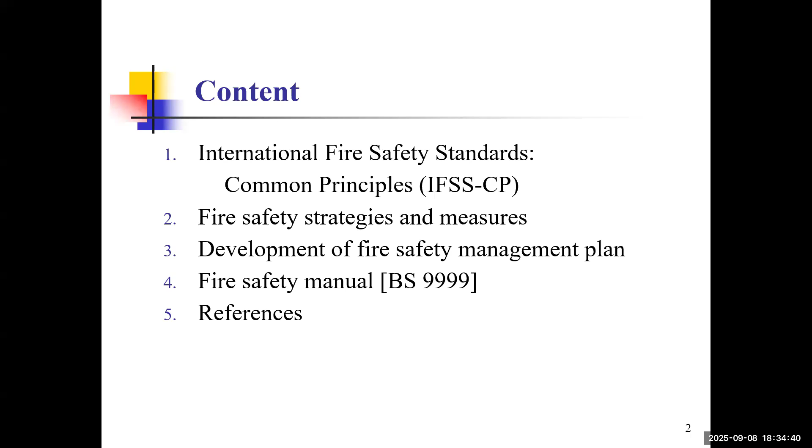So let's start. Let me hide the, sorry, hide this one first. Where can I hide this?

For the international fire safety standard, or the common principle. Common principle is a common set of internationally accepted principles for fire safety aspects, related to engineering design, construction, occupation, and ongoing management.

Sorry, I need to hide this first. How can I hide this? Okay, thank you. Floating meeting controls. Yes, otherwise it will block the view.

Now, the common principles are related to all real estate classes, and all regions and nations, regardless of political, economic, social, and technological differences. Fire regulations are designed to ensure safety and minimize the risks associated with fire hazard. Some of the principles target safe buildings, safe lives. Now, prevention, the first one.

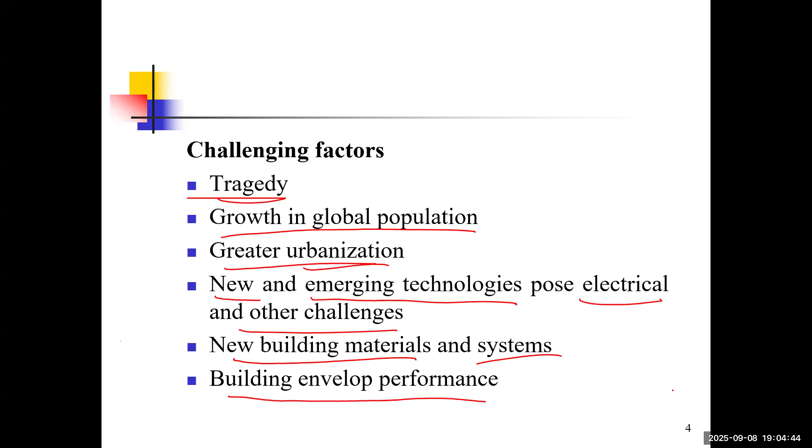Again, inspection, maintenance, and the use of some tested fire stopping system is necessary. Okay, so now we aim to improve the cost, business efficiency, quality, customer satisfaction, environment performance, and sustainability, predictability of

delivery time scales. Now for the costs, about money, we need to improve the cost efficiency. For example, we try to optimize the resources being allocated and try to streamline the process so as to reduce the time, the waste. The organization can also lower the operation costs and expenses.

Now, we have effective cost management, which involves careful budgeting, and we also have regular financial monitoring and adoption of cost-saving technologies. Now, this helps to ensure projects remain within the budget, increase the profitability, and try to have better value to the stakeholders, the client, for example.

Besides, the transparent cost control allows trust to be built between the client and the investor, which will secure future business and investment. Okay, so ultimately, the improved cost efficiency will support long-term financial stability and competitiveness in the business and the market.

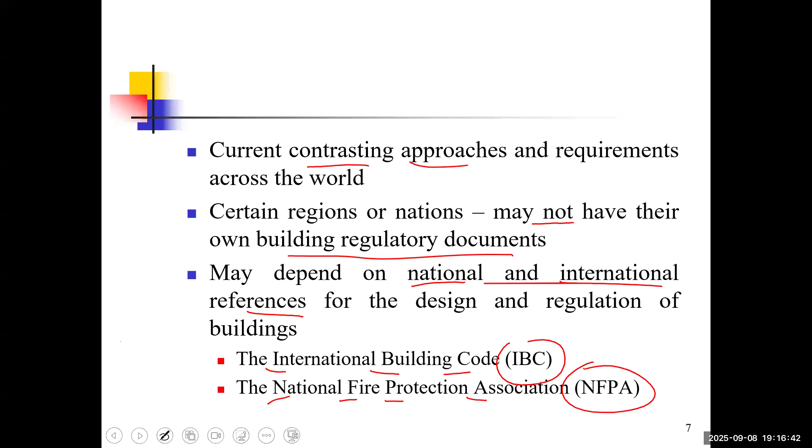Now, fire safety related UN Sustainable Development Goals. The following are fire safety related: the United Nations, UN, Sustainable Development Goal, SDG.

For example, we have good health and well-being. Fire safety reduces injuries, fatalities, and long-term health impacts caused by fire, supporting healthier lives and well-being.

For quality education, we consider schools' education to ensure uninterrupted education, and this also protects students and staff from fire hazards, fostering a secure learning environment.

We also have industry, innovation and infrastructure. By carrying out fire safety standards in infrastructure and industry, this encourages innovation in building materials and construction methods, while protecting investment and ensuring operational continuity.

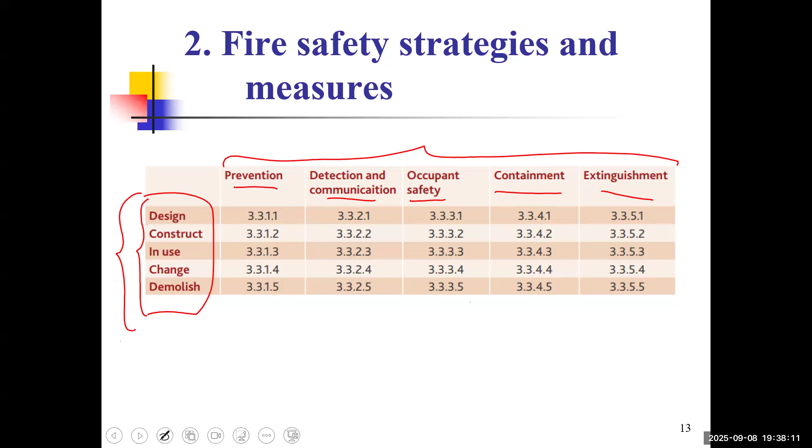So we may have some steps, in fact, for the framework.

If we look at the next slide, you can see we have the prevention principle, to establish how accurate and reliable the information is within the common principles. Prevention, detection and communication.

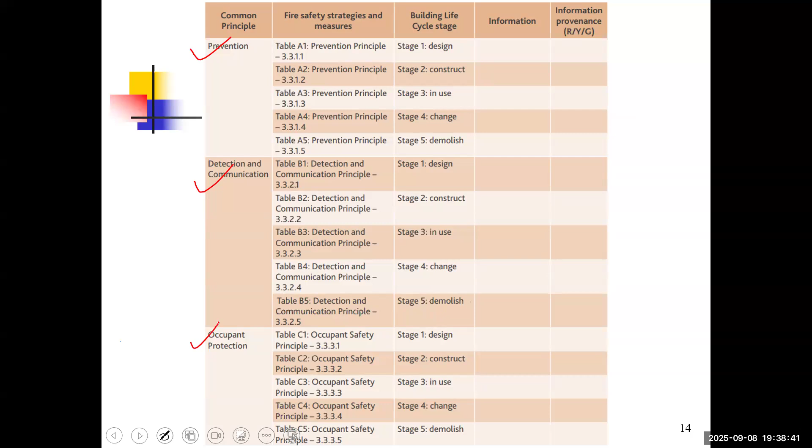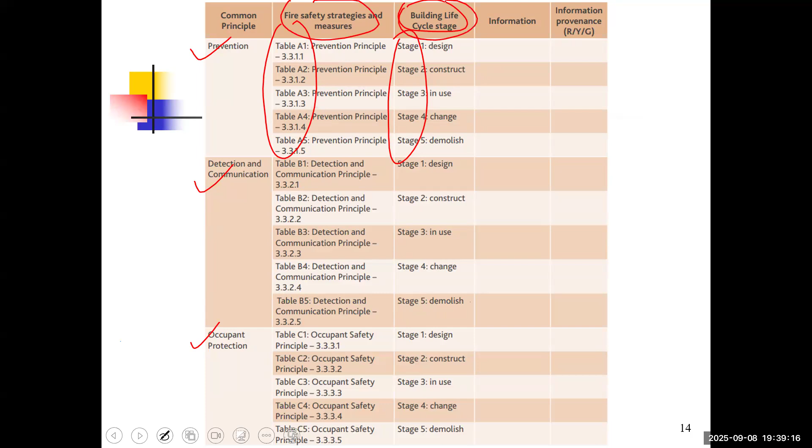On the left column is the common principle as shown, whereas the building fire safety measures is the second column, and the building life cycle stages is the third column. So we have a checklist for all the items.

Now, for the verification and enforcement at each stage, the key components of a good verification process have to include some points.

For example, accountability - that means it must be comprehensive and visible, so it is accountable. It should be competent, have qualified people, qualification, assessment, proper regulations, validation, and certifications.

We also considered quality assurance - it should be valid and verified. We have reviewed the cycle, whether it is in use or the codes. So in order for the framework verification process to carry out effectively, we have different parties for the review.

For example, the reviewer, we have stakeholders, we have independent certifiers and verifiers.

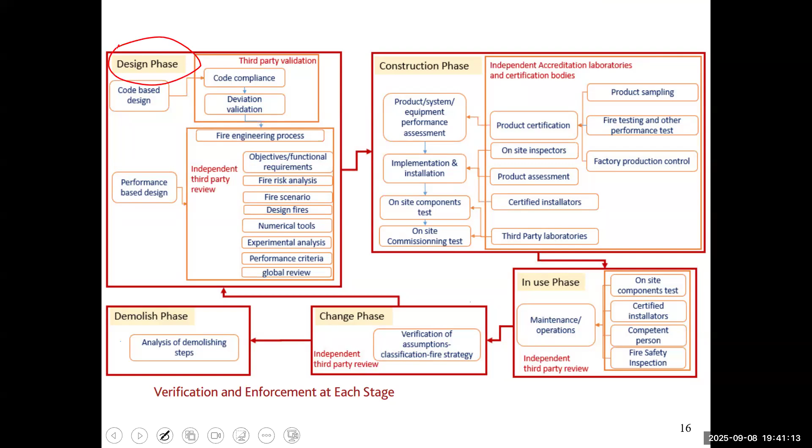The verification and enforcement make sure that the building has the fire safety level intended. It is important and necessary to carry out verification and control processes at each life cycle stage: design phase, construction phase, in-use phase, change phase, and demolish phase. This requires the establishment of an environment with third parties having qualification, certification, and accreditation. Also, involvement of the verifier does not relieve the responsibility of all the stakeholders.

Now, to apply common principles to the building life cycle, we have the prevention principle, which we try to consider at the design stage. The objective is safeguarding against the outbreak of fire and limiting its effect.

Assessment of risk and proposed fire protection measures should take into account recognized causes of fire, for example arson, electrical fire, and accidental fire, which may be caused by cooking, smoking, open flame, candles, chemical spills, hot work, etc. We also have explosion, sometimes due to dust or gas explosion, fireworks, and natural causes like lightning strikes and wildfire, which happens in forests.

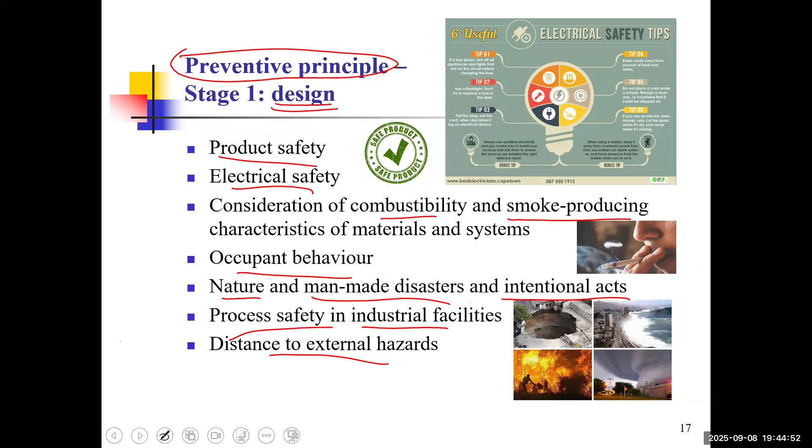The second stage is construction, with respect to the preventive principle. We have security, to prevent intruders or strangers who may deliberately or accidentally start a fire. Security and fire safety sometimes are in contradiction, since we want to allow occupants to evacuate freely without any obstacle.

For example, no door should be under lock. But on the other hand, due to security, we do not want strangers or intruders to come into the building to set fires, so we may lock the door. This may be a concern.

Control of combustible materials on site: control of waste, storage, and disposal away from potential sources of ignition. There may also be storage of construction materials and combustible substances, and control of items stored and used on site which may pose a fire risk.

Assessment of high-risk procedures—hot work permits or controls, for example used for welding and grinding—have to be noted.

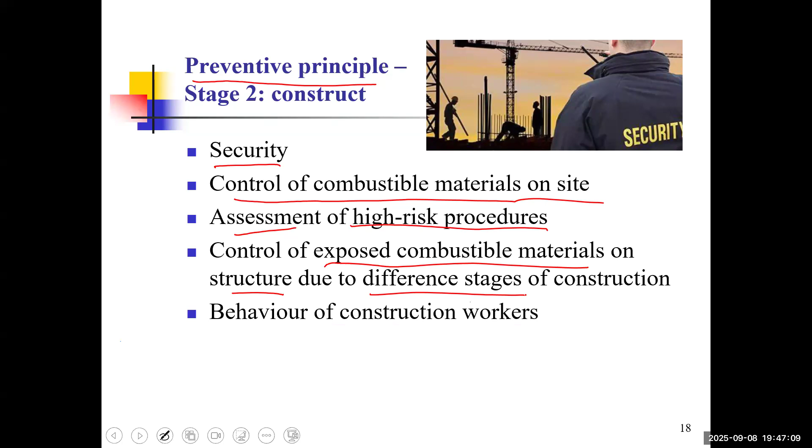Now how about the in-use stage for the preventive principle? We need to educate occupants on the prevention of fire, for example on hot work processes that may cause fire on site, on safe evacuation principles, and on safe evacuation of occupants and their behavior related to smoking and cooking.

Smoke controls—whether the extraction system is properly designed and maintained—electrical equipment safety, and identification of potential hazards such as storage of easily ignited materials in common areas.

Stage 4, preventive principle, stage 4: change. Soft change refers usually to some non-structural modification within a building, for example changes in occupancy, usage, or operational procedures, or introduction of new equipment and furnishing. These changes or adjustments can subtly alter the fire risk and safety requirement.

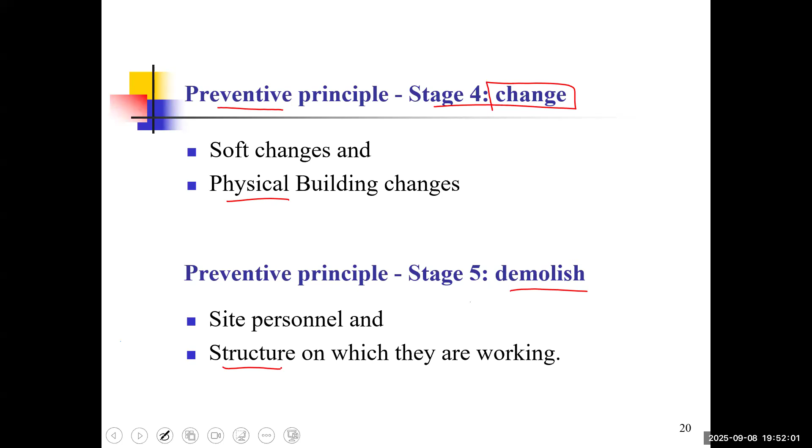Okay, next is the detection and communication principle for the design. During the design stage, the type of detection and alarm communication system available needs to be considered. Especially for high-rise buildings, the potential for communicating to all the occupants inside the building at once, as well as per evacuation zone, should be considered. Sometimes it's difficult to have an announcement for a whole 100-floor building to evacuate at the same time, so we need to separate into zones for phased evacuation.

Now, automatic systems include detection, communication, or even suppression systems. Sometimes the suppression system will link with the detection system. Warning system: we have the warning being activated, voice alarm systems, visual alarm systems, fire service communication, how to notify the fire service and fire brigades. Building configuration, which is internal geometry, sight lines, and spatial layout for wayfinding.

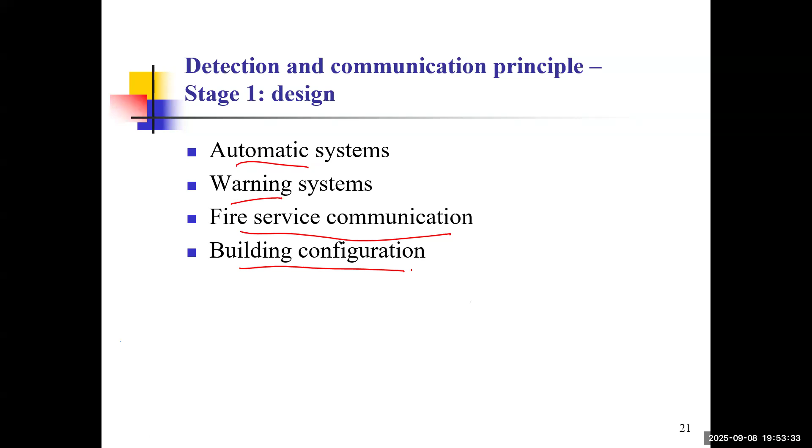Now, for the detection and communication principle during stage 2, construction, the presence of detection and communication is related to phased implementation of permanent systems and also temporary systems for detection, communication, and warning activities. Sometimes they are fixed and sometimes they are mobile. And we have the site office situation, similar, but with site information and the site office to be considered.

Fire service communication and education of workers, especially nowadays when we have more foreign workers who have a language barrier, okay? And we need to have sufficient signage to clearly indicate the safety routes, etc.

For stage 3, in use, when the building is in use, the focus will be on ensuring that the installed systems are available and functioning as intended. So we may have inspection, testing, and maintenance, ITM, of the communication system, fixed and mobile, and the detection system, and we also educate the staff and occupants. And ensure compatibility of new modules and existing systems.

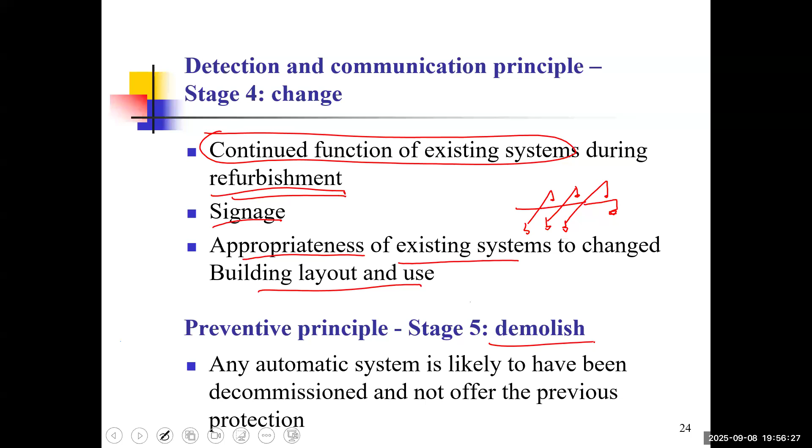Stage 5, demolish. As at stage 2, but it should be considered that any automatic system is likely to have been decommissioned and not offer the previous protection.

Okay, so if you look into the stages, the next will be the occupant protection principle with stage 1 to stage 5. So we are going across the matrix. Now, evacuation procedures, which include simultaneous evacuation. And we may also have phased evacuation, zone evacuation, protect in place and protected lobbies, and also refuge areas or refuge floors. So we need to ensure that evacuation communication is effective.

And at the design stage, establishing effective evacuation procedures is important to protect the occupants. Especially, the designer must plan clear and accessible escape routes which can accommodate the building's expected occupancy and use.

An example may be in older days when we had karaoke establishments, especially during the festive season or weekends. The karaoke boxes were usually crowded with more people than expected. For example, a room for 2 to 3 persons may have 5 to 6 people inside.

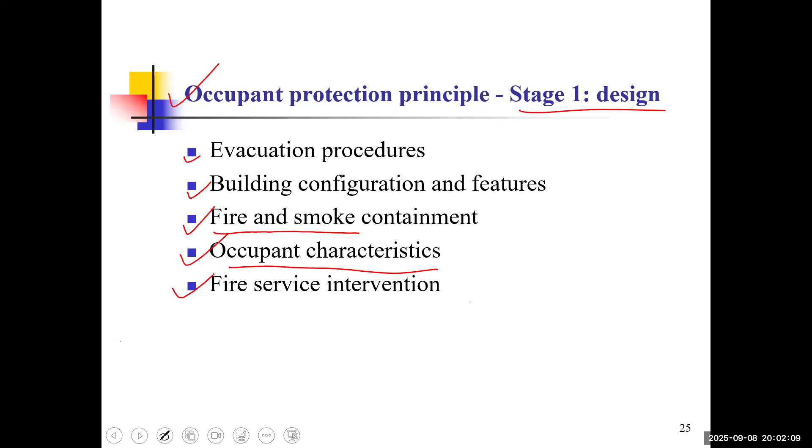Fire service intervention. Now, this includes providing access routes for the fire brigade or fire engines. We have the EVA, emergency vehicular access, which should be free of obstruction near the site, where the fire engine can make a U-turn or turn, with the EVA being available for firefighting and rescue.

Now for stage 2, construct: workers' characteristics, which include the number and types of workers and other personnel and their responsibilities, staff training, accreditation. We may have security guards, some work procedures being carried out by different people, and trained operators and the ability to rescue.

Temporary evacuation plans and procedures. We adopt control and communication procedures with respect to phased or complete evacuation routes and temporary impairment. Building configurations and features: for example, we have regular walk-downs of configurations. For the occupants, protection principles in use.

The education of occupants includes training and preparation for escape and evacuation, such as fire drills to be carried out from time to time. Even on the PolyU campus, you may read some emails or notices about fire drills to be carried out every year in certain cores or the library. And good housekeeping, which ensures the escape routes are clear.

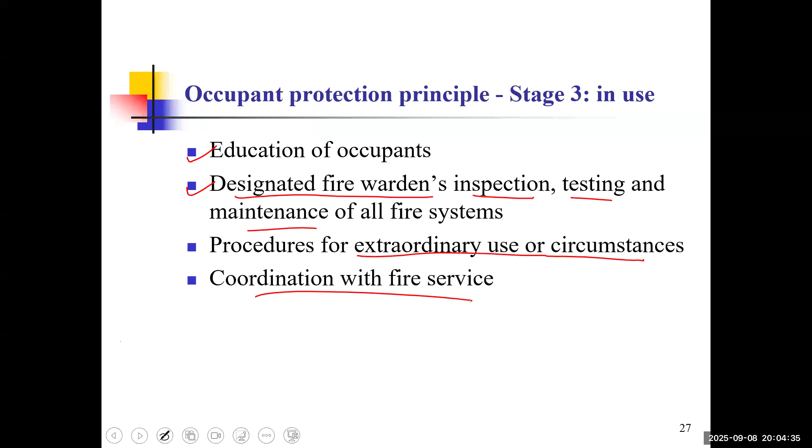Procedures for extraordinary use or circumstances. Now for this, we may consider large gatherings or evacuation path impairment, blockages. Coordination with the fire service, with the firemen and firefighting personnel.

Change, stage 4. Increase in the number of occupants and change in the ability of the occupants to escape. Disabled persons, children, and elderly are to be taken into account to adapt the occupant egress conditions. We may also modify the escape route with regard to the corridor width, for example, and the travel distance, the length, to be shortened. Demolish. Temporary modification of escape routes shall be communicated to all the workers and occupants.

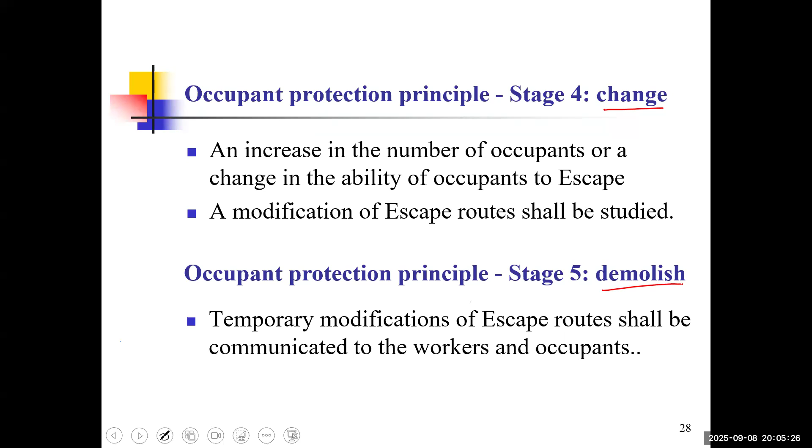Okay, so next part will be the containment during design stage. Combustibility and smoke producing characteristics of materials and systems are to be noted. The internal lining materials, the wall surfaces or the partition finishing. External fabric of the building may be considered.

Fixed firefighting systems include the suppression system, sprinkler heads, sprinkler system. Structural integrity: we ensure that if the wall is loaded, there will be no collapse because it has structural stability and adequacy. For smoke control, smoke hazard abatement, management, and smoke protected lobbies are some examples.

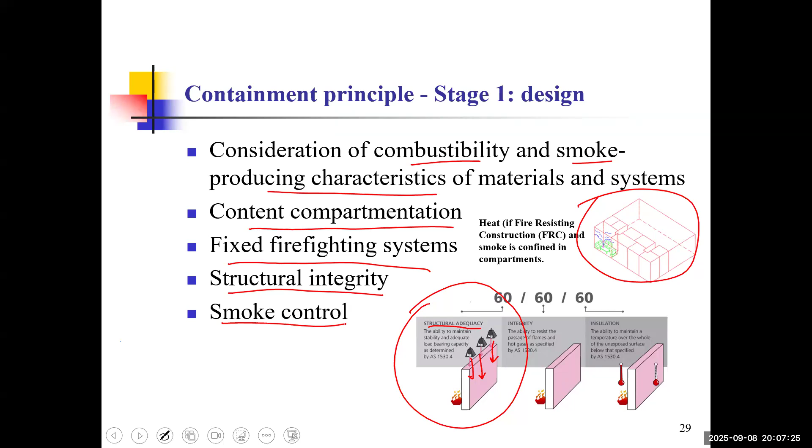Now for containment, stage 2, construct. Physical construction refers to fire protection to be installed shortly after installation of combustible materials, for example foam insulation and timber frame structures. Carry out inspection during construction. We may have the sign off by the relevant parties, documentation of as-built condition, and procedures that avoid fire ignition on special works like hot works.

In use, we have inspection, testing, and maintenance, ITM, of the systems needed for containment as documented during design and construction. For education of occupants, try to see how to avoid minor works compromising compartmentation and fire protection of combustible walls and floors. Housekeeping, also related to education. Recognition of suppression system and smoke control, avoid interference.

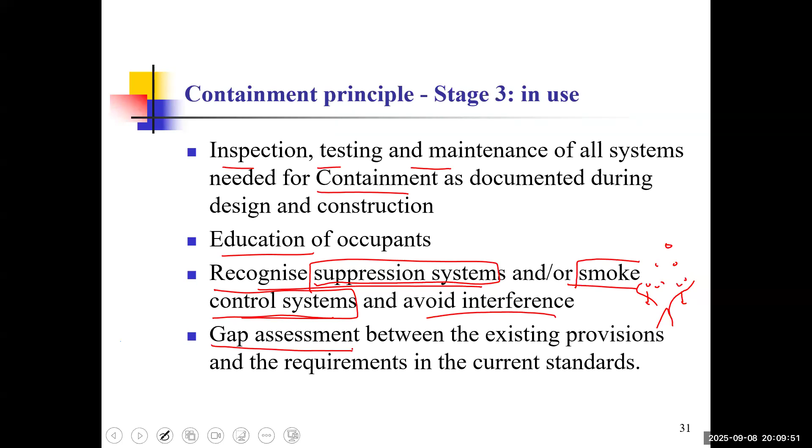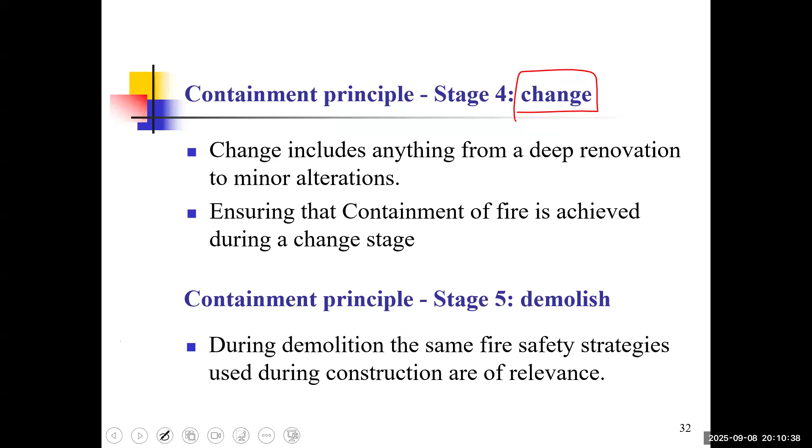Change includes anything from a deep renovation to minor alterations. So if the use category of the building changes, it will be necessary to revisit the strategies outlined under the design phase because the usage has changed. And this ensures that it is appropriate for the updated use regarding the management strategies, and also ensures containment of fire is achieved during the change stage. This requires the fire safety strategies and measures from the design stage to construction stage all to be considered.

Demolition. The same fire safety strategies during construction are of relevance, so containment measures are to remain present for as long as possible. If the containment measures cannot be maintained, operational approaches, for example a fire watch, may be necessary to address the potential hazard. Okay, extinguishment.

Now, we consider design again for extinguishment. Secure access routes for the fire service, so proximity to the nearest fire services station with respect to their arrival time. And we also adapt the parking conditions around the building according to the access. Protection of the firefighting access routes outside or inside the building.

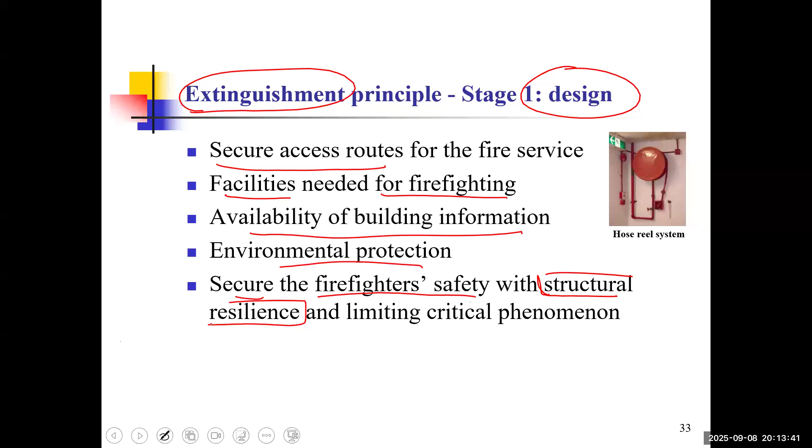Environmental protection, which refers to impact of water runoff and adjacent hazards and proximity of proposed construction to the existing built environment. Secure firefighter safety with structural resilience and limit critical phenomena. The firefighters need good stability of the structural walls in order not to allow the collapse of a wall which may bury them to death. Therefore, not only the occupants', but also the firefighters' safety should be of concern.

Extinguishment, construct: secure access routes for firefighters, facilities needed for firefighting, water supply, vertical access, manual firefighting equipment. Site information such as clear signage of the hazardous materials.

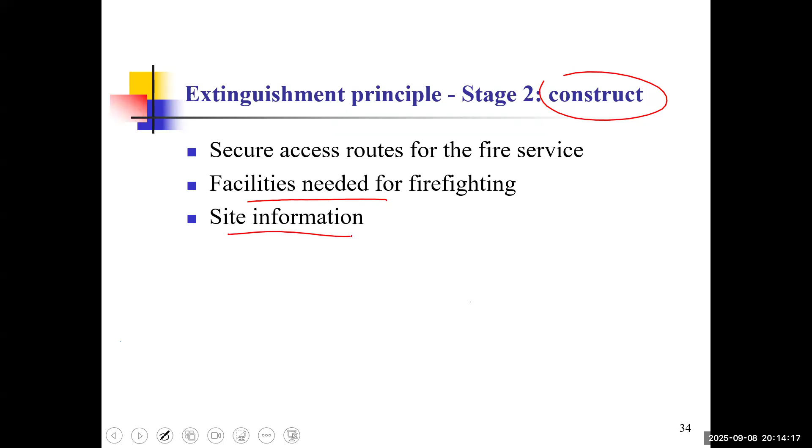Extinguishment principle, safety in use. Maintain clear routes for fire lanes and EVA, inspection, testing, maintenance of facilities. These are repeated, and I will not say them again. Availability of building information, for example, inspect that the signs are in place. Liaison with fire and rescue services.

Now, the staff should be well trained and prepare the occupants and residents to escape, with their location clearly identified. For example, sometimes we may have a roll call to see whether each occupant present has a tick in the checklist.

Good housekeeping relating to extinguishing facilities, signage, and fire service access. Change. Housekeeping. Ensure continuous fire service access. Availability of building information. Temporary signage is needed. Liaise with the fire rescue. So this is quite similar to the previous one. And we also need to have appropriateness of existing firefighting facilities and changed layout and use. Gap assessment is also necessary. For demolition, the same strategies used during construction are relevant.

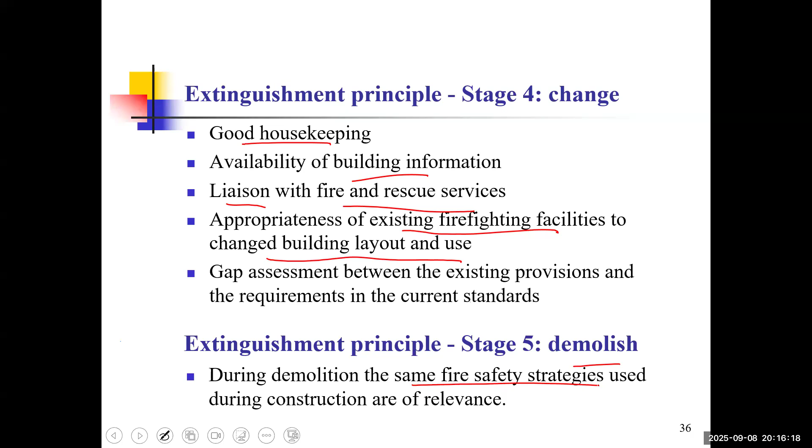Now, the development of the fire safety management plan. Fire safety management is in fact a kind of software which monitors the hardware, which is the active fire service installation and also the passive building design, to make sure that they are well maintained, kept in good condition and perform their function as intended. The primary objectives of fire safety management programs or plans are to safeguard lives and protect property. They also ensure business continuity by minimizing the risk and impact of fire accidents.

They may have preventive measures, which help, with the word prevent, to have regular inspection and maintenance of the fire protection systems, so as to ensure that ignition sources are well controlled, clear escape routes are maintained, and proper housekeeping practices reduce fire loads, etc. And we also need proper staff training and awareness campaigns to help reinforce safe behavior and make sure that everyone knows their duties and response in fires to prevent fire from occurring.

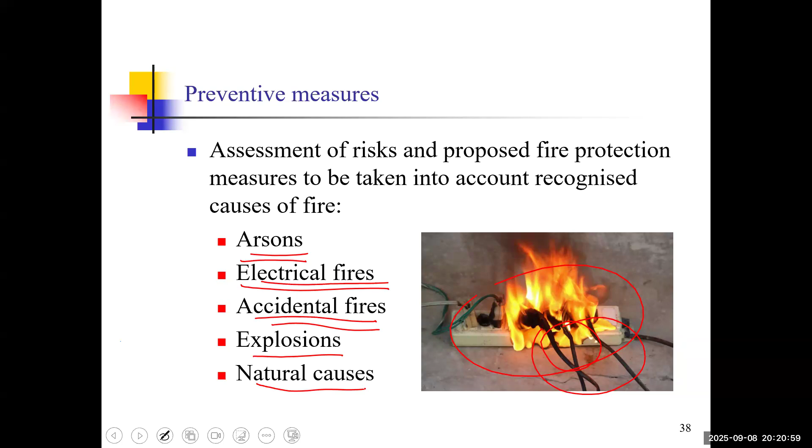So, ensure proper control of fire risk inside the building. Control of fire load, which is the amount of combustibles inside the building. We may have different hazard occupancies. For sprinkler systems, we have light hazard, ordinary hazard, and high hazard, which depend on the amount of fire load and the combustibility of the goods inside the building. We also need to provide sufficient safety measures, both passive and active. Passive measures are the structural protection: the walls, partitions, beams, columns, etc. The active ones are the fire service installations, which help to detect, attack, and respond to the fire.

Promote the fire safety concept to the occupants. So fire safety training, posters, and notices are necessary.

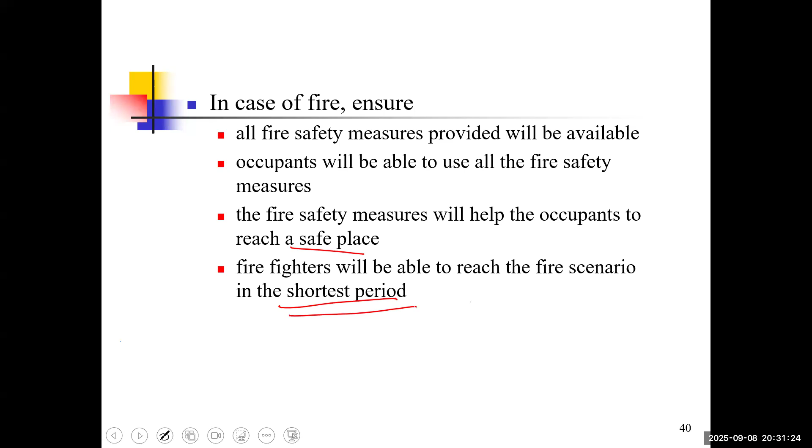Okay. Now, in case of fire, make sure that the safety measures are available and the occupants will be able to use all the measures. Also, they can help the people to reach a safe place. Especially the firefighters will be able to reach fire scenarios in the shortest period. Okay, no delay, and in fact, make sure that all are provided available because we need to ensure that they are properly designed, maintained, and can be operated.

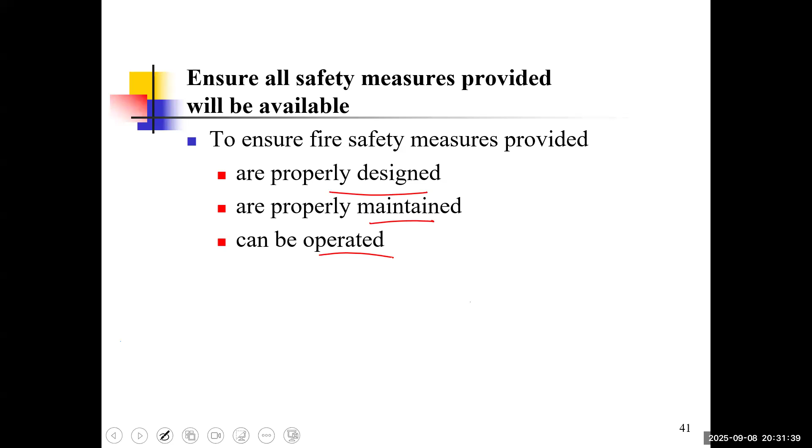Excuse me. To ensure the occupant will be able to use all the measures, we need them to have proper training. Need to make sure that in-house staff are well trained in advance, not wait until there's a fire, then they react. Okay, no, but proper actions to be taken with proper training and provide proper fire action plan.

Okay. Usually we will have three main plans in the fire safety management plan. We have the maintenance plan, staff training plan, and the fire action plan. So the first two plans, the maintenance plan and the staff training plan, are during the normal mode of operation, whereas the fire action plan is during the fire mode of operation or the emergency mode of operation. So we need to know and train the staff to assist occupants and use all the safety measures properly.

Now, ensure the fire safety measures will help the occupant to reach a safe place. For example, there should be sufficient information, the routes, the layout plans, usually provided at the back of the door in hotels or even in campus rooms, lecture theaters.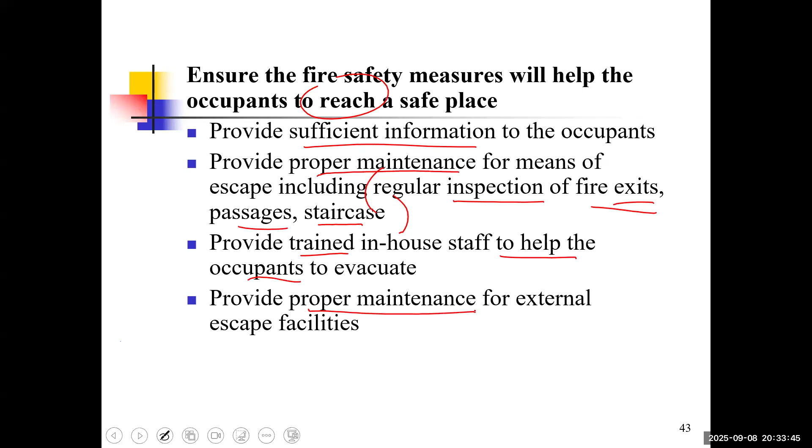We will also provide maintenance for means of escape, the MOE, with regular inspection to make sure that no rubbish bins or no obstacles block the way in the exits, passages, and stairs. And they should be trained to help the occupant to evacuate and provide proper maintenance of the external escape facilities.

Ensure firefighters reach the scenario in the shortest period. For example, the fire marshal or fire safety manager can provide layouts and records of the building. Okay. For example, after taking the roll call, you find someone is missing, then you can notify the occupant, notify the firefighters, and provide firefighting access, means of access for firefighting and rescue, provide communication between buildings and fire brigades.

Now, for the maintenance plan, as I've mentioned, the maintenance plan and the staff training plan are two plans under the normal mode of operation, whereas this is the emergency mode of operation. Should be, let me see, should be NM, EM. Normal mode of operation and emergency mode of operation. This is normal mode. This is emergency mode.

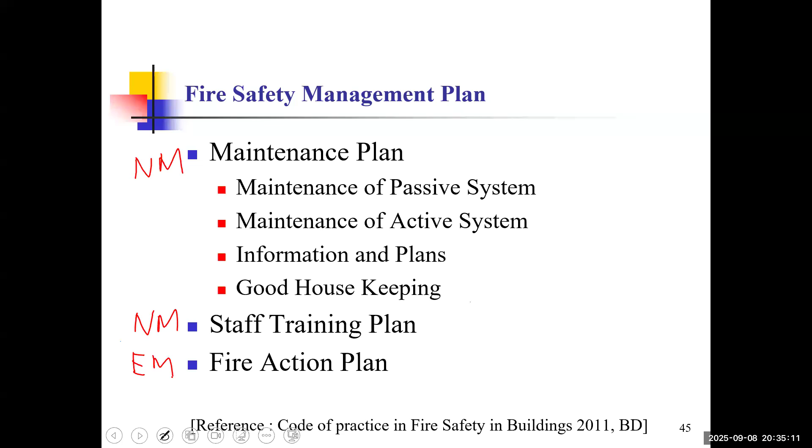So for the maintenance plan, we have maintenance of the passive system, such as the escape route, the escape doors, fire doors, whether there are any blockage in the corridor, the width of the corridor should be kept clear, being fixed, no obstruction of any kind, even the hose reel should not block the way. Are there any damages? Okay, any damage to the fire safety system, barriers, equipment must be promptly identified and reported.

Timely repair of damaged fire safety features to restore the full protection function and make sure that the building remains compliant with the code's requirements and the occupants are well protected.

Maintenance of active system detectors. Okay, try to have well designed locations of detectors, sprinklers, no blockage, as I've mentioned, by goods, extinguishers. They should be of suitable agent to be applied to different areas. For example, no water should be used in electrical services plant room.

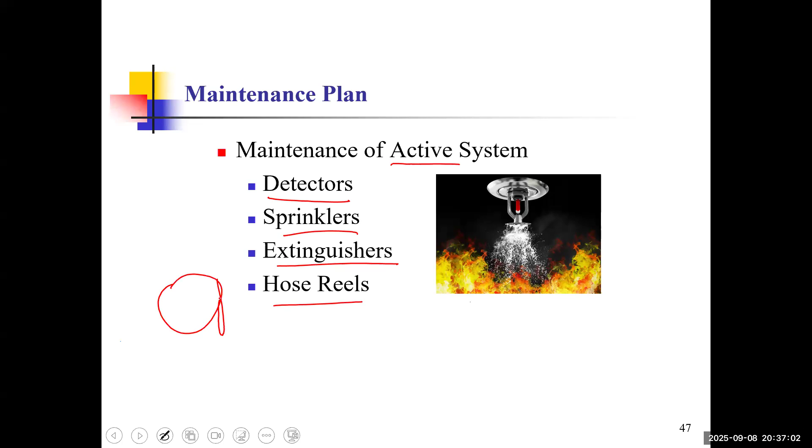And we may consider foam to be used in car parks in some cases, hose reels, okay, to be well provided with the 30-meter tubing coverage, should be less than that, okay? So in case you have a layout which is greater than 30 meters, you may add an additional hose reel, which will be able to protect every part of the building without missing.

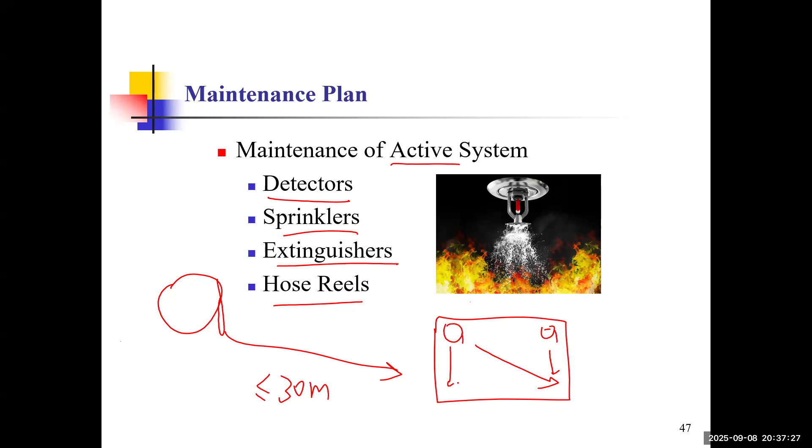Information and plans, okay? The layout, according to the accurate building layout, even after renovation and refurbishment, if there are changes and updates, the layout plan should be the latest one. Evacuation routes or escape routes should be clearly marked and documented, which is needed to guide the occupants to escape. And the plan should be highlighted with available exits and also where you are, okay?

Occupants, information about the number, the characteristics of occupants, for example, their age, mobility, any special needs, okay, is important. Nowadays, we have barrier-free access for all the people who need to access through wheelchairs. And in fact, tailored evacuation procedures should be available and allocate suitable resources to make sure that all the individuals are properly evacuated.

Information. Okay. Some comprehensive fire safety information, such as emergency procedures, the contact details, and equipment locations should be readily accessible by all the occupants. And they should be properly informed with clear instructions and updates. Signs, okay, well-placed and lit signs, visible ones, should be located next to the exits, fire extinguishers, and where emergency instructions are given.

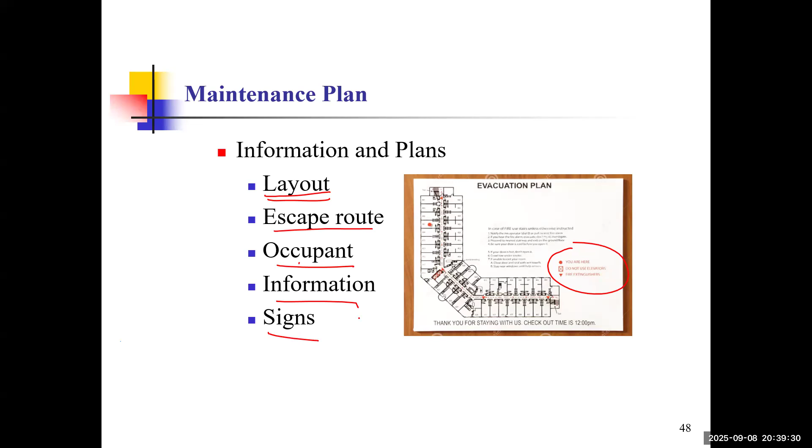Good housekeeping, proper rubbish disposal, is the key with respect to good housekeeping. We also have removal of the rubbish regularly with safe storage of goods, preventing obstruction of the escape route, and use of heat sources, for example heaters, stoves, cooking facilities with open flame, electrical equipment, is essential to prevent fire occurrence. All heat sources should be kept away from combustibles, regularly maintained, and never left unattended.

Now for the second plan, this is the staff training plan. We need to have designation of staff duties, so everyone needs to know what they are responsible for. For example, some of the staff themselves, the seniors, need to take the roll call or try to check the floor or the doors, whether they are closed, and make sure everyone is evacuated. Fire wardens may have some responsibility and duties: use of equipment, how to use portable extinguishers, guide the occupants to safety, give instructions clearly. Training: describe and explain emergency procedures.

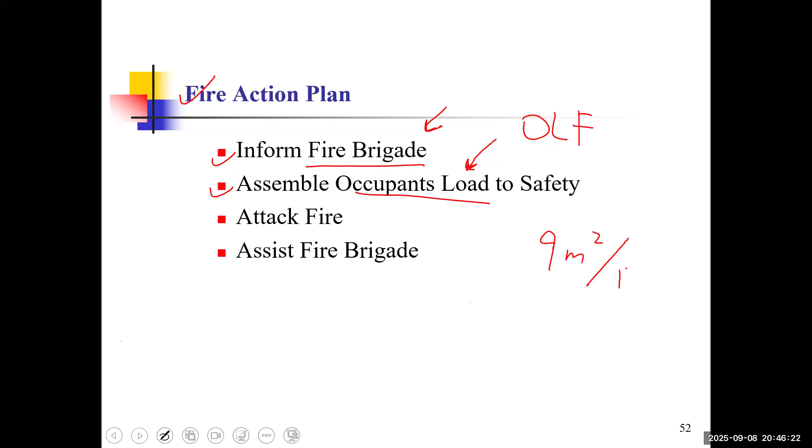Assemble the occupant load to safety. The number of occupants refers to the occupant load or occupant load factor. Usually we note the occupant load factor from the building's code of practice. For example, each person will occupy 9 meters square per person in an office building, so we can estimate the number of occupants - for example, in a 900 meter square area, there is around 100 people.

The occupant load should not exceed it. Try to attack the fire, especially when it is at a small or early stage, while it is still small. Otherwise, you need to run away and allow the fire engine or firefighters to fight the fire. Assist the fire brigade.

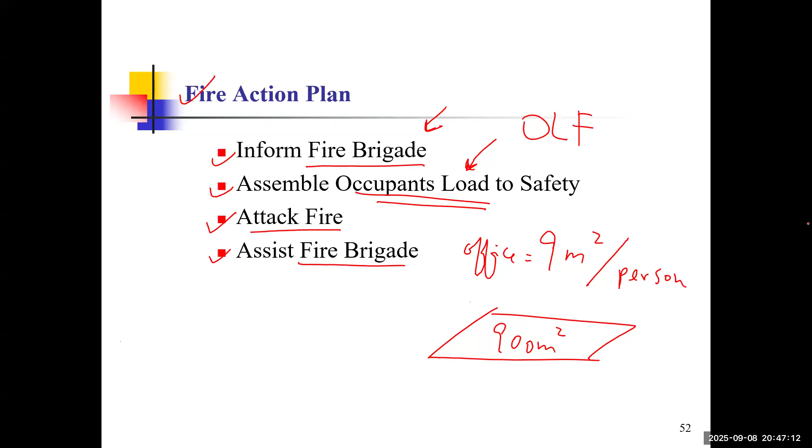Now the next part will be the fire safety manual. For this, we refer to the British Standard 9999, which is the code of practice for fire safety in the design, management, and use of buildings. Annex H particularly refers to the safety manual.

In the safety manual there are lists of items. It should have the assumptions and philosophy which lead to the fire safety design, and explain the nature of the fire safety plans, planning, and draw documentation at design stage, along with responsibilities of staff and management regarding fire safety. They also need to provide continuously updated records, with any changes or alteration work marked.

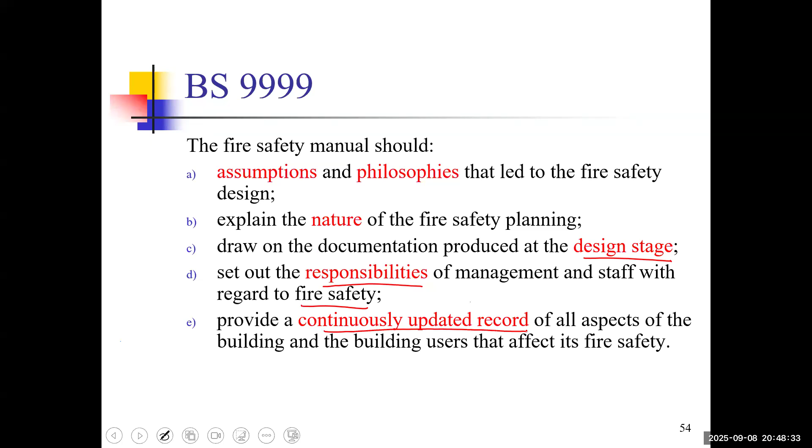So the actions to be taken by the designer: it is the responsibility of the designer in the first instance to initiate and create the fire safety manual of the project. The designer should also inform their clients of the nature, function, and capabilities of the fire precautions designed into the building, especially those whose nature might be less evident, not obvious.

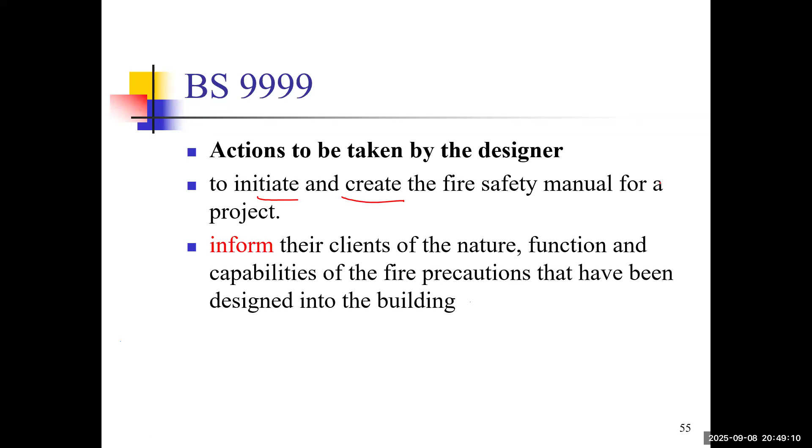Now, for actions to be taken by the fire safety management team, the fire safety manager, fire marshals, or fire safety designated representatives should keep up the manual. This type of manual should not just be placed there, but should be well communicated, well updated, and have real implementation of the procedures and actions to be taken.

Now, the initial occupants of the building need to develop the manual provided by the designer at handover, so they need to know what is being designed, and while the building is occupied, what needs to be done.

Provisions need to be made for recording the results of monitoring tests, evacuation drills, results of tests of fire safety systems, active fire service installations, and other relevant information. The fire safety manual should also be made available for inspection or test by an auditor - a third party, for example a regulator, the government, or officers for operational purposes of the fire and rescue service.

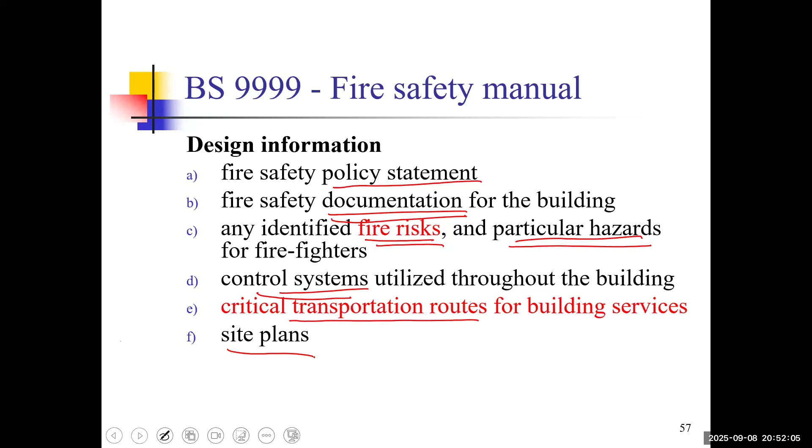We also have the control system utilized throughout the building - is this a fire suppression system, water-based or gaseous agent being used? Critical transportation routes for building services, and site plans noting modifications or any evacuation routes available.

Assembly points - if it is a school, maybe the basketball court; if it is a shopping center, maybe the entrance runner or the space outside the main entrance of the premises. Muster stations. Access for rescue service - where the firemen can go into the building and fight the fire, with what equipment, and what communication systems are available.

This includes details of alternative formats, if provided, and a full description of the system, both active and passive, for the building.

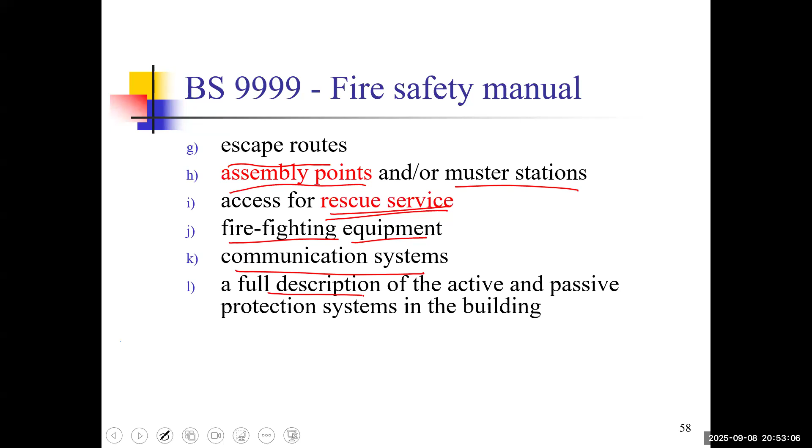A full description of all the other design aspects which have a direct bearing on fire safety management. This includes, at the management level, the operator's manual - how to operate the fire safety system - inspection, maintenance, and repair manual, and prevention and security measures, for example, measures to prevent arson fires from occurring.

That's not only fire safety but security, as I told you - security and fire safety may counteract each other in some sense. The Q item is detail of interaction with security, building management, and other safety systems.

Next is drawings of the building identifying the smoke control zones, fire detection zones, video cameras, voice alarm zones, and key equipment locations. So we may have detection zones being identified, but the alarm zones may be considered to be larger. Description of basic fire precaution measures.

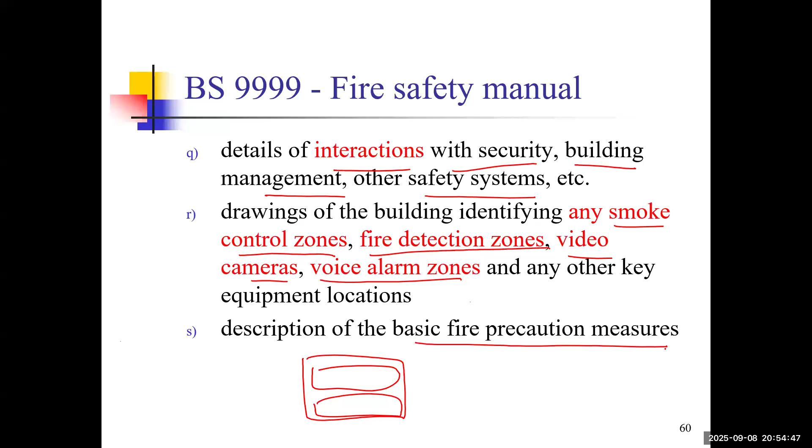Documentation from contractors and manufacturers should include instructions, guarantees, and test certificates, and some spare parts will also be included. This covers as-built drawings, specifications describing the details of components and systems in the building, equipment operating parameters, and record drawings.

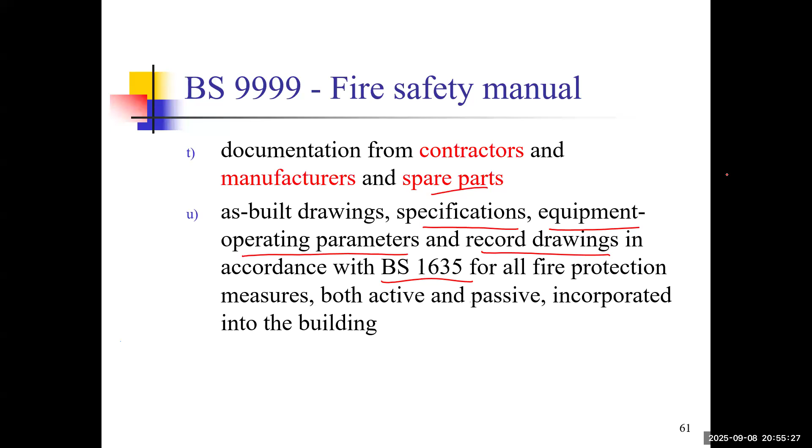This is in accordance with British Standard 1635 for all the fire protection measures, covering the results of acceptance tests, which might involve the regulatory authorities and insurance companies' representatives.

Fire safety is important as it is also covered by insurance, no matter whether it's our home, shopping centers, or hotels, etc.

An IT system is used to manage the fire safety manual and information relating to approval, certification, and licensing, with copies of the certificate and license. This may also include maintenance schedules and record keeping for the manuals and certifications.

Then there are pre-planned procedures for salvage, information relating to other reasons for protecting the building, for example the property, the contents, what is being placed and stored inside, the fabric, and sometimes heritage considerations for historical buildings, as well as the environment.

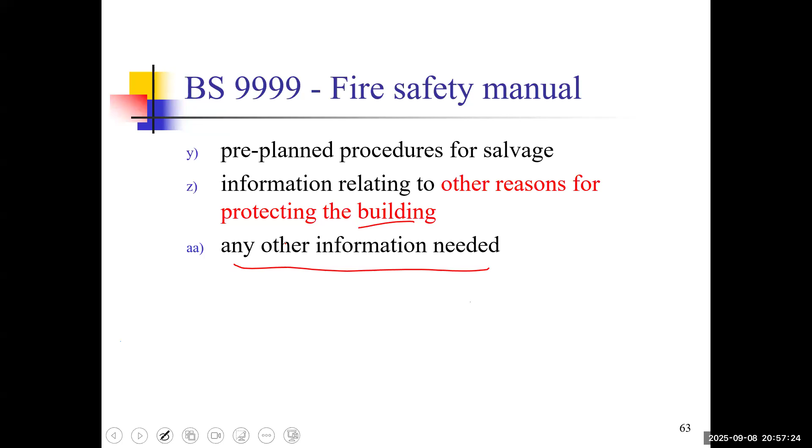The reference quoted is Malhotra, although in 1987, he was the first researcher who defined fire safety management in terms of protection or maintenance of fire safety provisions. This also considered training of staff and fire actions, as in the Code of Practice for Fire Safety in Buildings.

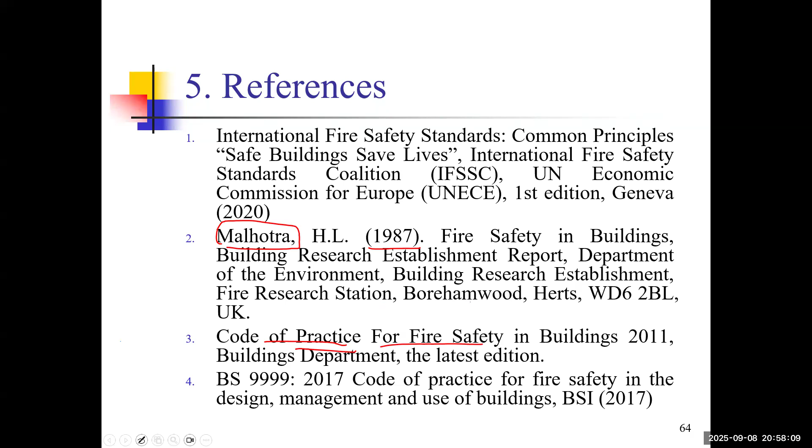Before we end, I would like to go to the Buildings Department Code of Practice. We went through this last time, but I would like to emphasize the fire safety management section, from the Buildings Department Hong Kong Code of Practice.

This is the 2024 edition Code of Practice for Fire Safety in Buildings. As we went through briefly last time, it covers means of escape, means of fire resisting construction, means of access.

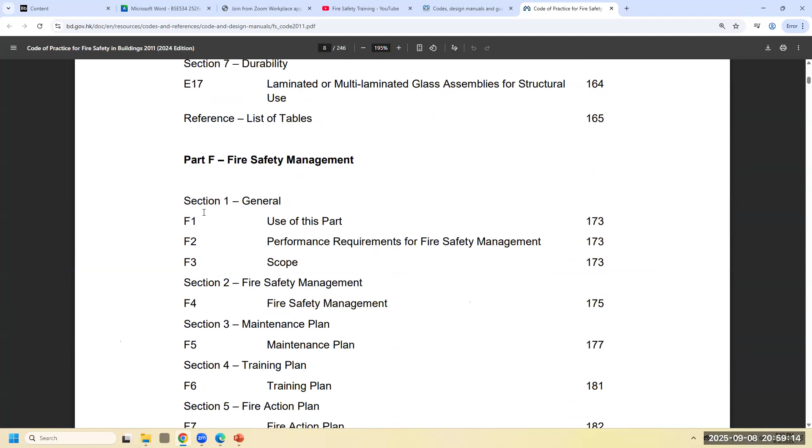It also covers fire property of building elements, and fire safety management in Part F, which is important because it is the section on fire safety management in the building code, covering the legislation aspects of fire safety management.

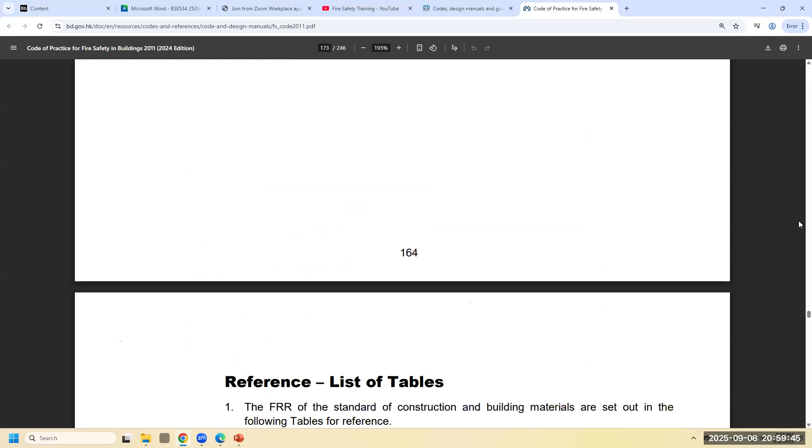On page 173, there are several sections, section 1 to section 5. On page 172, we also notice that they have provided guidelines to manage fire safety provisions.

This includes management and maintenance provisions, with performance requirements for fire safety clearly stated, along with the scope. Commentary provides further description of how maintenance and management of provisions is carried out, by different means, for example passive, active, and ventilation systems.

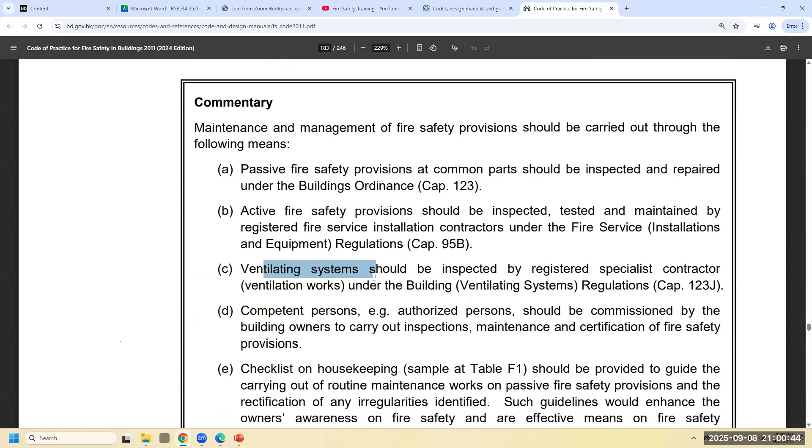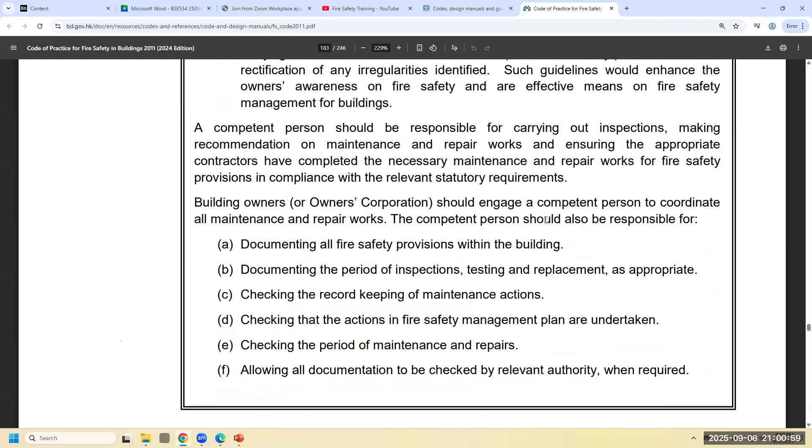These are the basic provisions and systems, competent persons, and checklists. Building owners also engage competent persons to coordinate the maintenance work, and the responsibilities of the competent person have been detailed in a list.

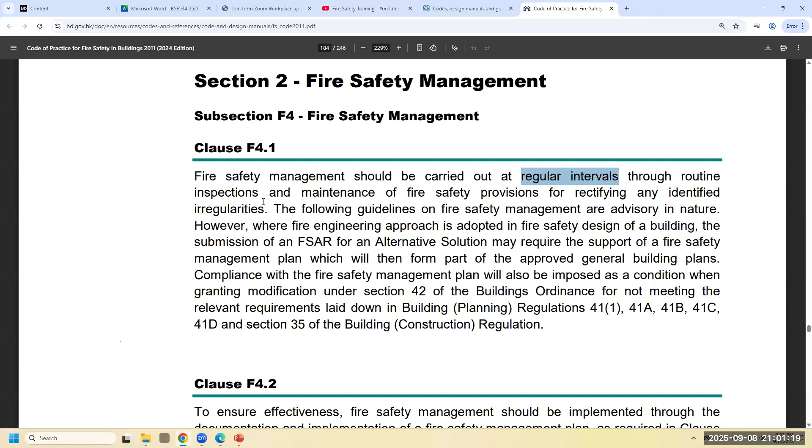For the section on fire safety management, it is described in detail how often, at what regular intervals, routine maintenance and inspection should take place. This is also stated in Building (Planning) Regulation 41 A, B, C, and D, and the Building (Construction) Regulations.

These building planning and building construction regulations are under the laws of Hong Kong, Chapter 123, the Buildings Ordinance, within which there are subsidiary legislations. For details, you can refer back to lecture 1 where we have some notes on that.

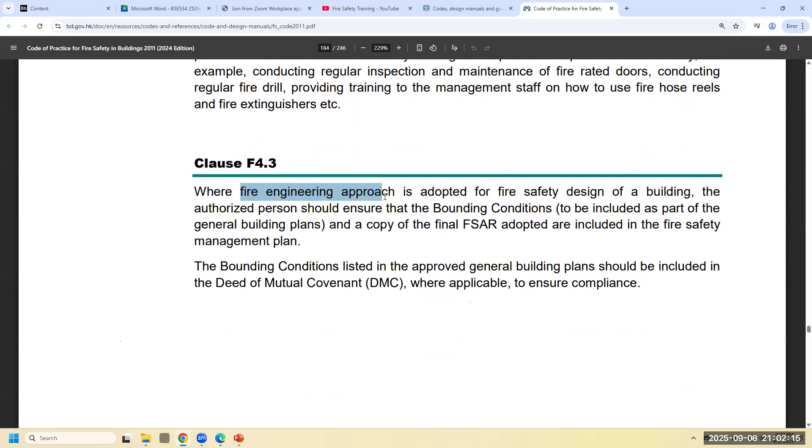Now, to ensure effectiveness, fire safety management, or sometimes we call it FSM, is implemented through the documentation. We have the fire engineering approach to be adopted, the fire safety management plan, and the bounding conditions.

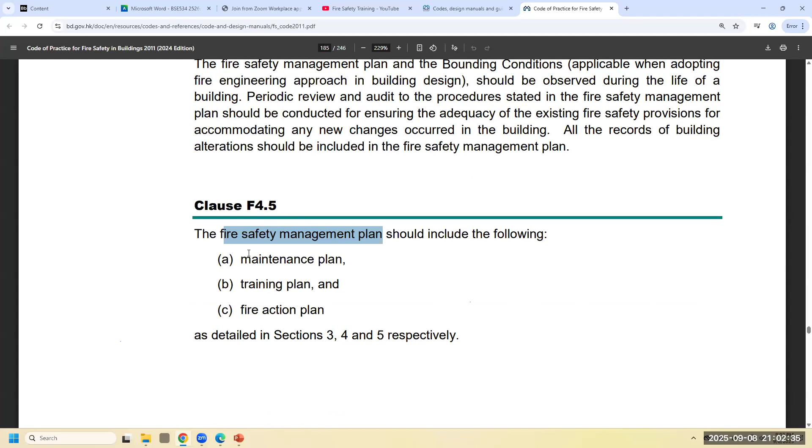The fire safety management plan, in clause F4.5, includes the maintenance plan, training plan, and the fire action plan. The maintenance plan is further described in detail in the subsection.

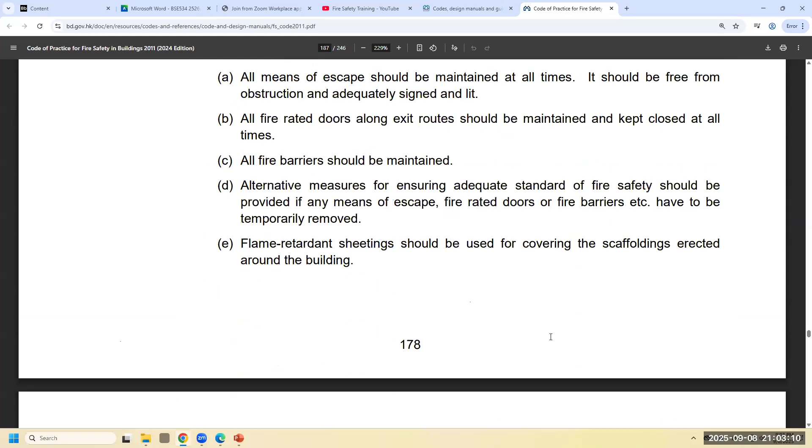This includes regular inspections for unauthorized building works, or UBW, and also considers changes such as alteration and addition works, renovation and repair works, as well as how to deal with the management of open kitchens.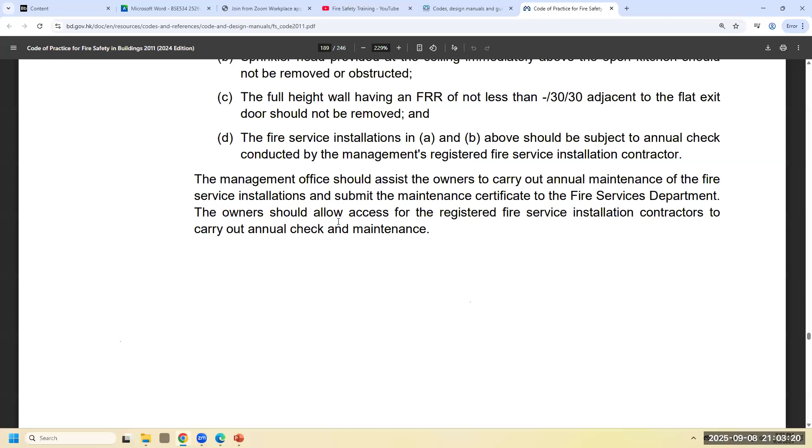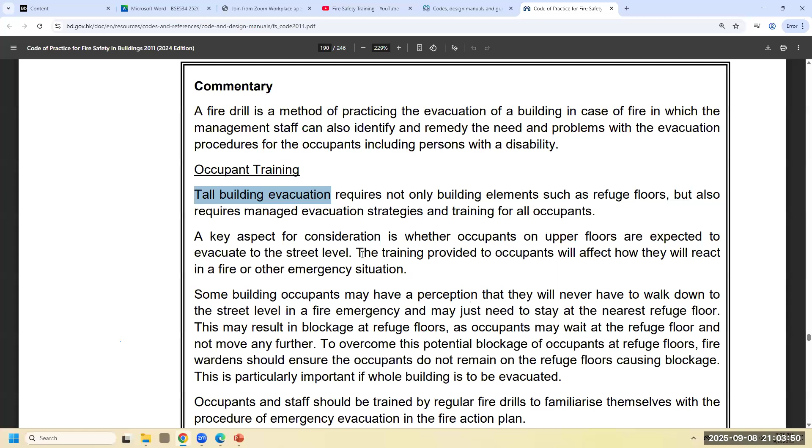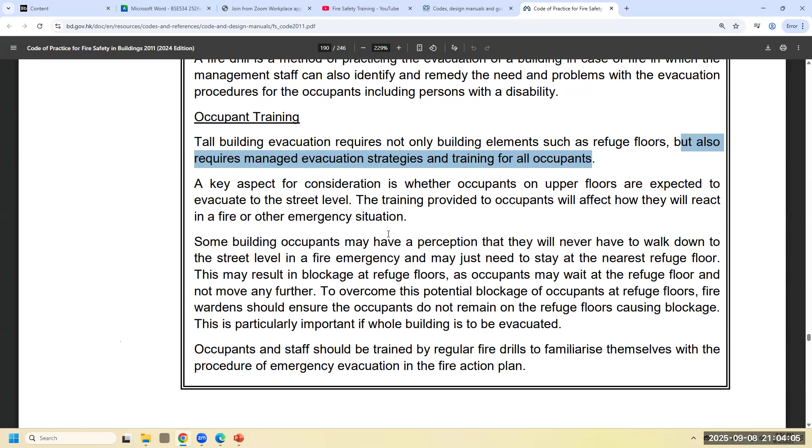For the training plan, in section 4, proper and adequate training must be provided, including a description of duties for staff, and fire drills and seminars taking place. It mentions the importance of drills and occupant training, especially for tall building evacuation, not only concerning building elements like refuge floors, but also managed evacuation strategies and training of all occupants. If you read through in detail, you can find lots of important points.

Finally, the fire action plan covers procedures to be taken in case of fire: we dial 999, inform the occupants, and help them evacuate. It also includes evacuation procedures for persons with disability, and the provision of temporary refuge spaces.

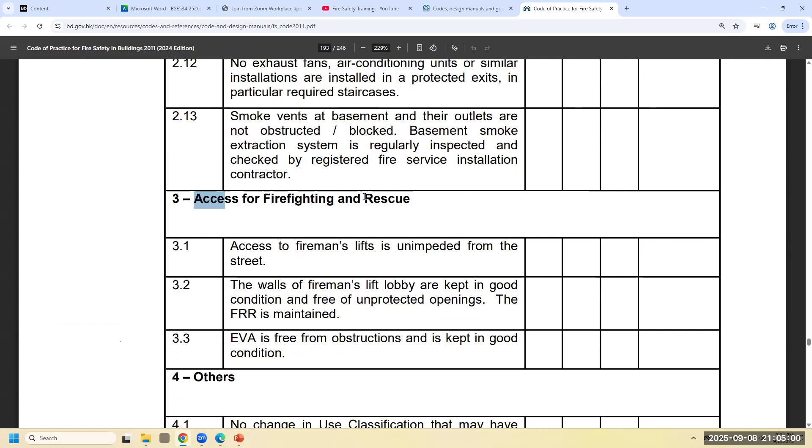Okay, now for appendix F1, it has the sample checklist on housekeeping. Now, according to means of escape and fire-resistant construction, access for firefighting and rescue, and others, okay? Each has different items in the checkbox, whether it is yes, being provided, or no, it is not provided, or N/A, not applicable. And if it is not properly provided, what follow-up actions are needed?

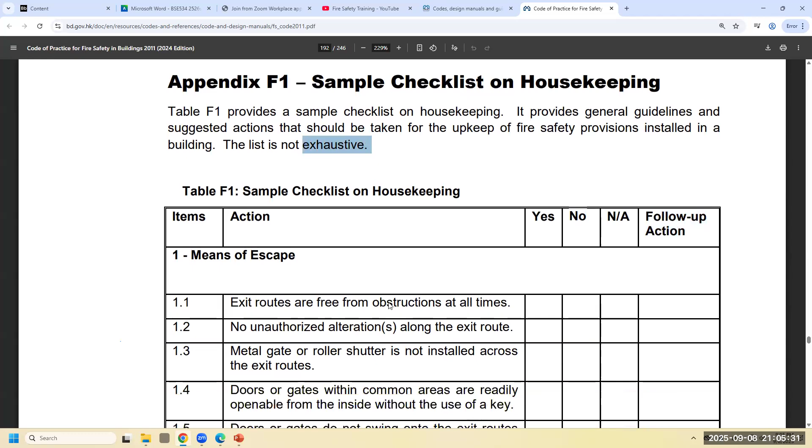Okay, so the list is not exhaustive. Okay, you may have additional items if needed or necessary. Okay, so part F on fire safety management ends on page 185. So I hope that, well, for this subject, you are having open book, so it may not be necessary to memorize all the things, but some relevant points you may highlight and read through before you attempt the questions or examinations, etc. Okay.

Okay, fire safety in buildings. Oops, what did I do? Sorry. Sorry, quick view again. Or preview. Preview. Okay, this is a preview. So it has some information regarding the publication dates, etc. Yeah, the content, the general recommendations and background. The risk profile and assessing the risks, ensuring effective fire protection, etc.

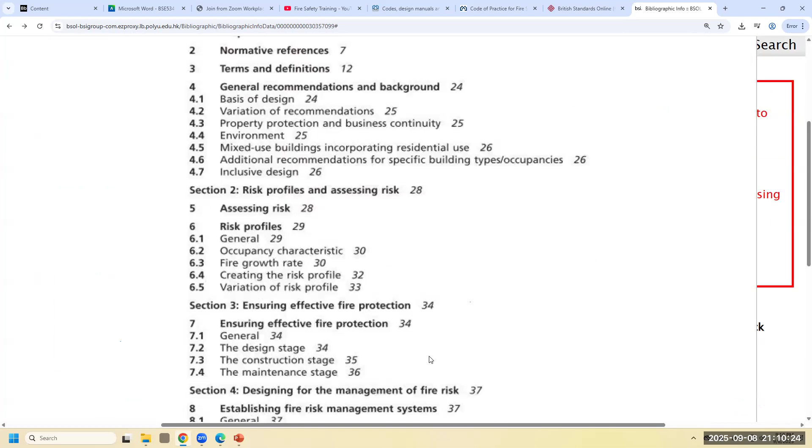Okay. And Annex H will be the fire safety manual with the fire safety management strategies. Sometimes people ask about fire safety management plan, fire safety management manual, fire safety management strategy, or fire safety management elements. Actually, you may consider a plan or manual to have different plans. For example, the maintenance plan, fire action plan, or the staff training plans. And within the plan, there are some elements related to fire safety management or strategies, that is the tactics or the skills used to perform proper fire safety management.

Okay. So you may have a fire safety management plan or fire safety management scheme, which is equivalent. And of course, in different codes or different standards, different terms may be used. Okay, any questions?

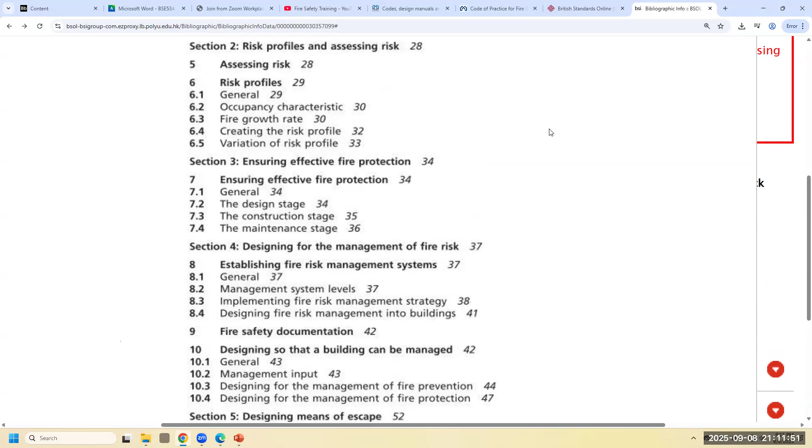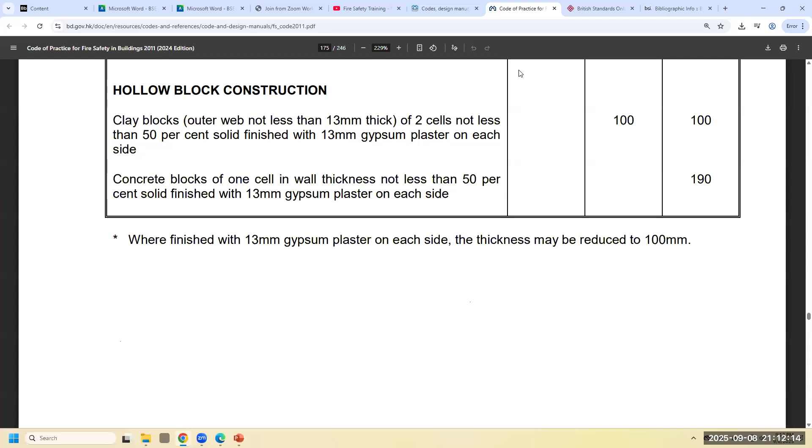Now, next week, we will have a topic on code review and performance-based fire codes. For the code review, we will base it on the codes, for example, the one that we just showed you, the Code of Practice for Fire Safety in Buildings. This one is a popular one. And another one is the active fire services, which is the FSI code, which is the red book. This one. Although it is white in color on the website, usually the cover is red in color, so we sometimes call it the red book.

Okay, someone in the chat. COP, yes, you are right, Mr. Poon. Thank you. Will it teach the heat detector coverage? Heat detector coverage will be covered in the fire engineering system. But maybe part of it will be covered. Okay, I think you asked last time about the separation between the sprinkler heads, right?

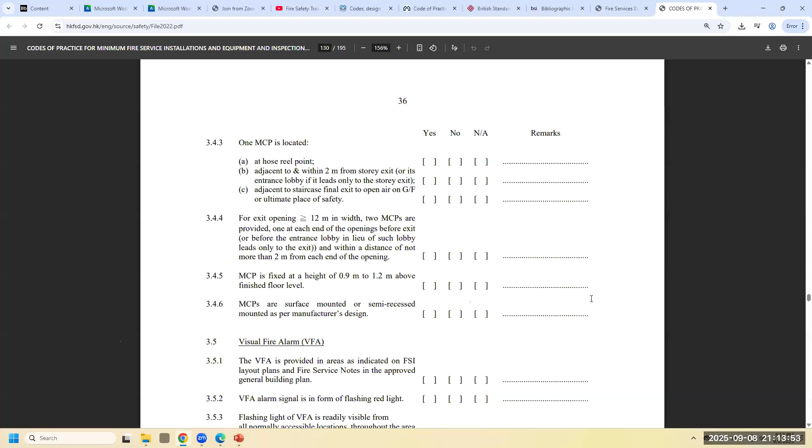So in fact, for a quick look, you can go to the checklist. Let me see. Checklist, appendix 4, if I remember correctly. So in the codes, you will note the requirements. I think here, the 5.3 and the 7.5 distance between the smoke detector and the heat detector. You may be able to find this here, okay? Useful knowledge, I often use this in the workplace. Okay, thank you. Okay, so any other questions?